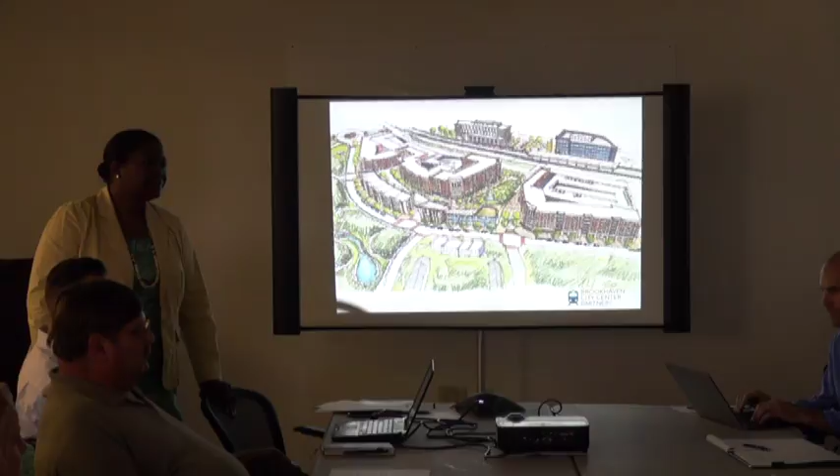Did you have any concern about a potential bias with the demographic being so young, or did that reflect the neighborhood? I think in a way, honestly, it balanced it out, because those are the segment of the groups that will likely want to go online. But if you look at our community meetings, we probably had an older group of people in attendance at those meetings.

How many people answered that didn't live in our area? I'm sorry, how many people answered the survey that didn't live in Brookhaven? It was 12%. Yeah, 88% lived in the city of Brookhaven.

The percentage of people answering the survey who use MARTA in a variety of ways, how does that compare to the general population's usage? I have no idea. We would have to dig in. So you're looking for, as a percentage of the population, were these survey takers primarily in our service area? Well, yeah—of the population, if only 10% use MARTA, but of these survey takers 40% use MARTA, that would probably be a significant difference specifically for the city of Brookhaven. Yeah, we'll look and see if we have that information. We have a research and analysis group at MARTA that may have that, so we can see if we can find it.

All right, thank you. Good. Thank you. And I think, as you said, it's going to be online. We're going to place it on our website. Yeah, get on the website.

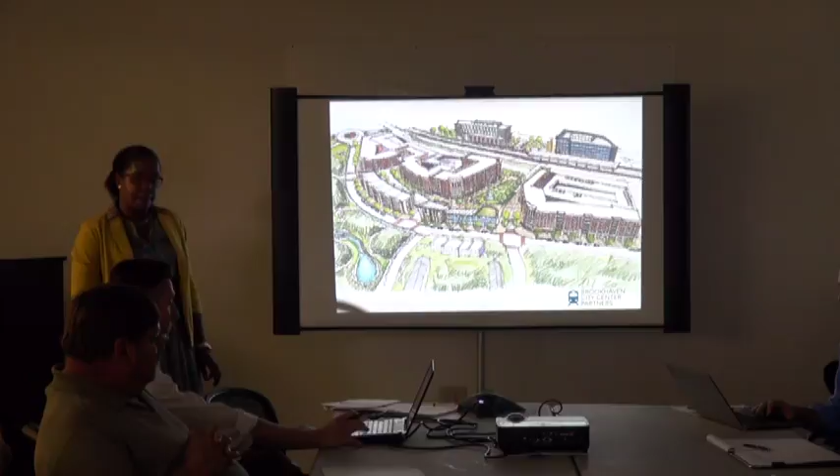The connectivity was a common theme too last week in urban planning—what are we doing to think of this more in context to good quality urbanism and connections into the neighborhoods? We have stayed pretty focused on site-specific details in a lot of our presentations, so Nicolia, who is our planner with Cooper Carry, is going to put a little more color on how we've been looking at this from the start, from that perspective, and some of the geometry and barriers that this site has that create some complexity.

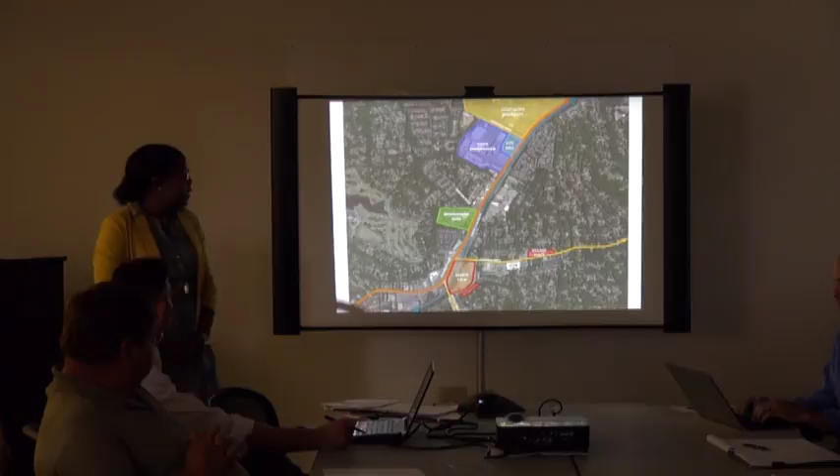Okay, thank you. So I'm going to take us back 2 years to 2014 when we started to look at the site. We received the RFP, and there were goals that MARTA had outlined for mixed-use communities—more density, improved parking, a walkable environment. Then there were the LCI goals, which had to do with creating a mixed-use center and really creating a walkable environment. All of those desires and goals align with what we would like to see happen here.

So one of the first things we did, as a design team, was try to figure out what it is that we want to accomplish here. There were three important things that came out: we wanted to improve the connections to the greater Brookhaven and its amenities, and we wanted to also create a better walkable pedestrian public realm and environment.

We also wanted to create a village center, a focal point, something that could become a heart space and an identifier for the city of Brookhaven. One of our early diagrams looked at Peachtree Road and how it is a main thoroughfare through, but also a connective spine to amenities in Brookhaven, like Oglethorpe University, Town of Brookhaven, City Hall, and Brookhaven Park. One question we had initially is how do we make connections to these amenities, and also down Dresden to the Brookhaven Village Place area? How do we incorporate connections to all of these?

Part of understanding how to connect is understanding the network we're working in. The white indicates the road system and road network currently existing around the site. There are two major constraints and barriers that run through it, almost like a river: the CSX freight line, which created a west and east side, and the MARTA tracks, which are elevated. We can get right up to it and do some things under it, but it creates development issues when constructing buildings. Peachtree Road, as wide as it is, is somewhat of a barrier too, but not if we can get it more connected. Then you have North Druid and Dresden, and we've had all the traffic discussions—these are the things we were trying to reconcile as we moved forward.

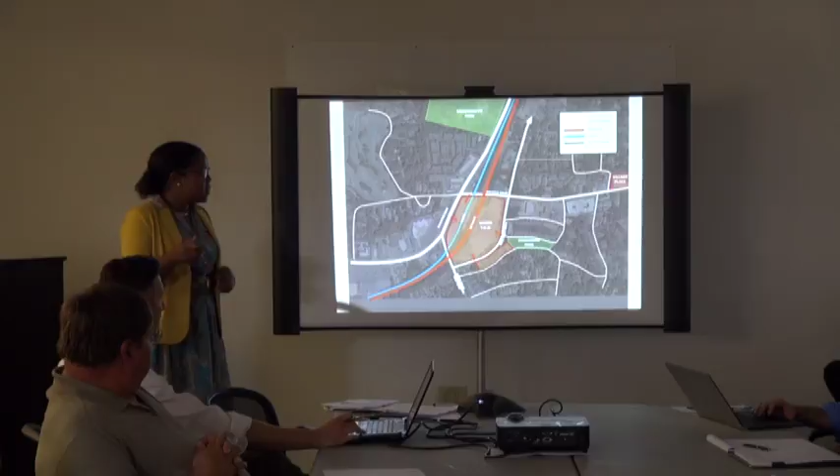One of the first things we thought about is how do we make this more connected? Traditionally in planning, we talk about a quarter-mile walking distance, averaging 5 to 10 minutes. From the MARTA station tunnel entrance, the yellow indicates what is perceived as a 5 to 10 minute walk for an individual moving through the TOD area. We wanted to figure out how to make this more connected. With the constraints of the CSX freight line and MARTA, breaking up the blocks and getting them smaller became more of a U shape with connections almost north-south. That's an introduction of a roadway that runs through, an introduction around, connecting back to the existing Fernwood and street grid, while keeping the access points into the site that currently exist along Peachtree and Dresden.

The second thing we wanted to think about is connections, not just from a vehicular standpoint, but from a multimodal and pedestrian standpoint. We looked at the bike and ped plan. The purple indicates bike lanes, and the dashed purple are sharrows, which are bike lanes essentially sharing the same space as vehicles. The blue lines indicate improved pedestrian connections, which would fill in gaps with sidewalks currently happening in Brookhaven. The orange is a multi-use path. We wanted to ensure we had connections and incorporated all of this into our design.

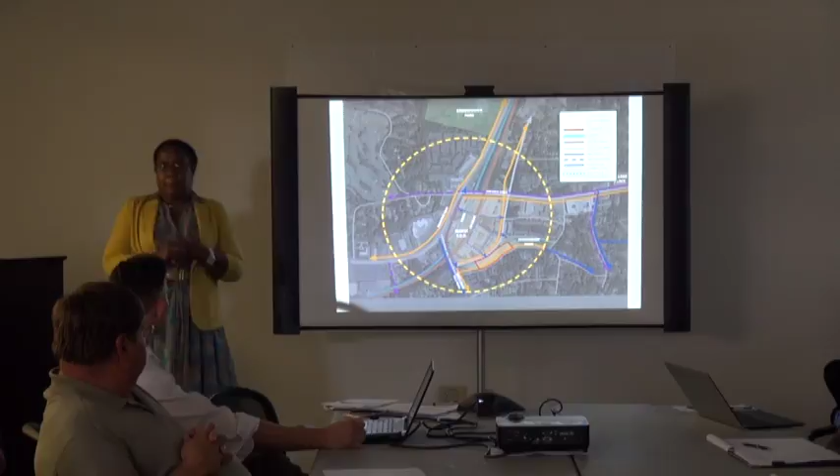Next slide. That was the city of Brookhaven bike and ped diagram. When was that done? Last year, completed this year—fairly recent, just a couple months ago.

One comment in addition: the multi-use paths that were just mentioned are not necessarily separated from the road in the definition Brookhaven has in their study. For instance, along Peachtree, they have a multi-use path, but it's essentially a 12-foot sidewalk. A lot of times when we talk about multi-use path as planners or bicycle enthusiasts, we're talking about an off-road system used for joggers, rollerbladers, bicyclists, and walkers. But in this case, Brookhaven's definition for Peachtree is a multi-use path that's a 12-foot sidewalk.

Thanks, Gary. That highlights where we're at—along Dresden, for example, there is a multi-use path. Around our site, we have 15-foot sidewalks along Dresden, down Apple Valley, and North Druid Hills, and 20-foot wide sidewalks along Peachtree. So it's wide enough, as Gary said, to accommodate some multi-use.

Does that include the 5-foot planting area between the street and the path? Yes. So a 15-foot path would be a 10-foot path with a 5-foot offset? Yes, just wanted to clarify. A 15-foot path is what they described, with a 5-foot planting area for lights, trees, and so on, and a 10-foot walkway. Probably the best way to describe it is a 20-foot pedestrian zone, in which you have the actual pavement and the street.

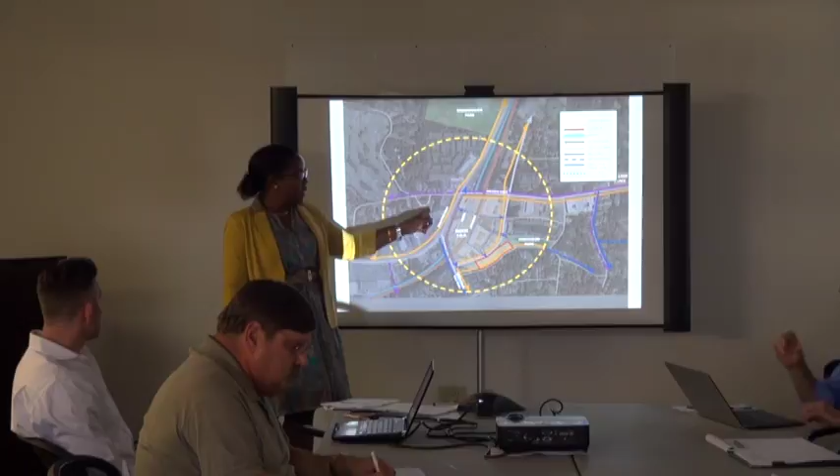When we start thinking about pedestrian connections into the site, we wanted to really connect across the site, east to west and connecting north to south. One of those major connections is through the tunnel, but we wanted to keep that over. You can't go over with the CSX freight, but there is an existing tunnel that we envision enhancing, making that connection through the site and then connecting through to Fernwood.

Following the streets within the project, making more of a connective place, and connecting to the future MARTA parking deck, which would be located here in future phases. Also strengthening and connecting Peachtree to the existing North Druid Hills, or the proposed North Druid Hills multi-use path, maintaining the Dresden multi-use path, and incorporating the good recommendations that came out of the bike ped plan.

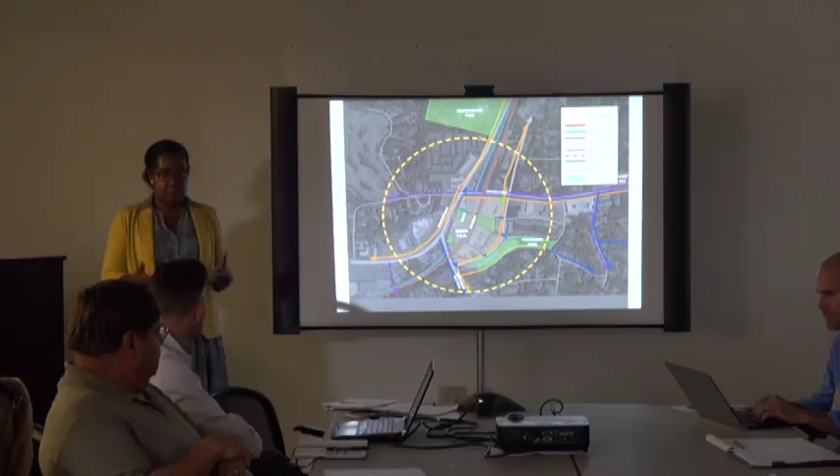One of the things that was loud and clear, and it's nice to see highlighted in the survey, was this need for a public gathering space, a community space, more parks and more open space. The LCI talked about this special focal spot, being the heart of Brookhaven, and that's what we're hoping these spaces can become, a symbol of that.

So I'm going to take a minute to clarify that, feel free to jump in if you want. Part of why we're going for rezoning is that the underlying zoning does not currently support the Peachtree overlay zone, the Brookhaven Peachtree overlay zoning. That is why we are going for rezoning.

The current zoning has industrial, commercial, RM75 and R75, which essentially gives you about 30 units, 400,000 square feet of office, and I think 30 to 50,000 square feet of retail. And it's quite a bit of parking associated with that.

If you were to read the Brookhaven Peachtree overlay guidelines and the zoning, it does not support anything that was suggested. So we are going for rezoning so we could actually build to the spirit of the Brookhaven Peachtree overlay.

I don't know if there's anything else to say. That was one of the questions from last week, and also in some follow-ups, why are you doing it? There was some broader community concern. Are you going for a bunch more density? What are you up to? Next week we'll do a better job explaining why we're having to go through all this.

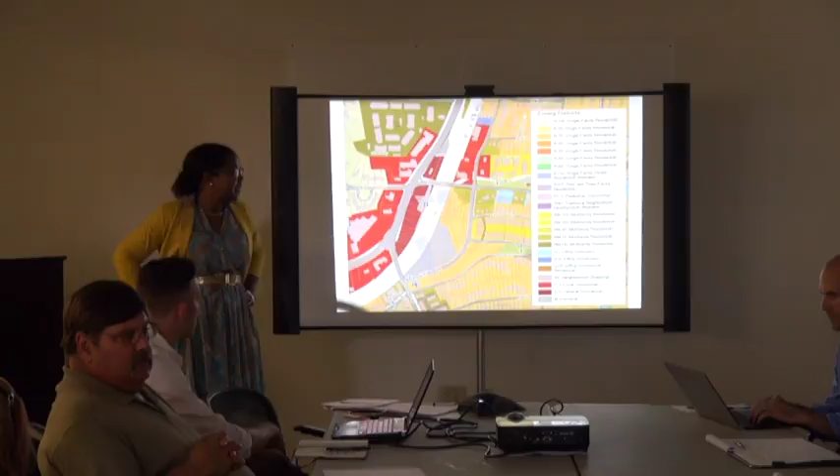Not to spend a lot of time since you went through the plan yesterday, but a quick recap of where we were back in May versus today: we reduced by about 140 units, we're almost 118,000 square feet less in office, and we've upped our neighborhood-serving retail and restaurant, and we've added the hotel.

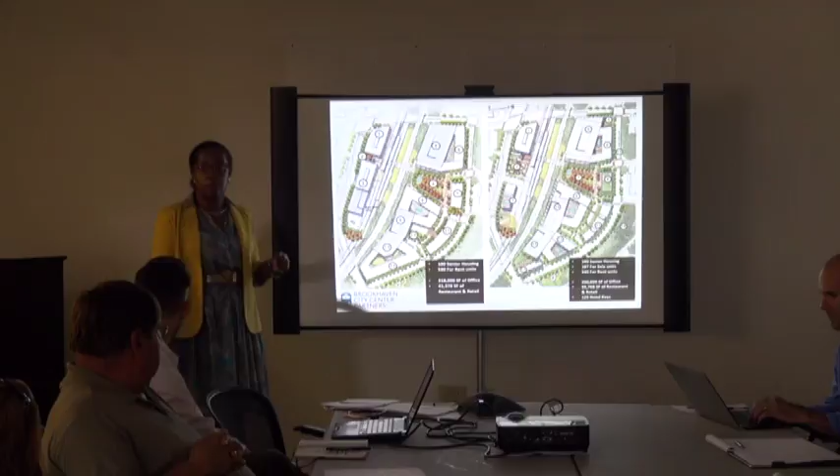And then the for-sale is now over on the right, a huge part of the southern part. You opened up the barriers to the street a lot—we punched more, it's a lot more porous now than it was. Down here we've offered more housing diversity, more products, made a more porous edge, created more comfortability, and added more. Scale is dropped, yeah, scale is dropped.

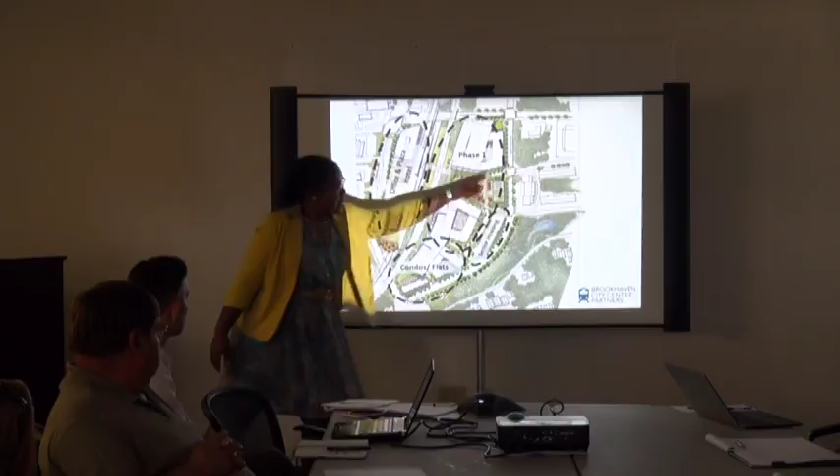The market concept we're really excited about, and on the capital part we're hoping to do something pretty cool there. Are the condo prices going to be in phase 1? They'll come later, probably phase 2. We've earmarked it as phase 2 because we're not going to be able to sell stuff until the first phase is clean—it's very difficult to sell high-end product when it's a construction zone next door.

So they're probably phase 2. Yes, phase 1 centers around the town green—that's about 340 units, about 40,000 square feet of neighborhood-serving retail, and about three-quarters of an acre of public space that we're giving back.

Do you have some idea of the price range on the condos, or have you mentioned it? We don't—by default, since you said high end, they're going to be pretty expensive. But we haven't even started programming because we've just introduced that whole concept.

Also, the way we're structuring this now, the senior housing block we're going to use for staging to get through phase 1—we're going to need some temporary parking for MARTA. We're going to go into design and programming for the for-sale product, and then we'll be in pre-sale on the office building, and it can go as fast as we get that done.

Does that make sense? It's a little bit of a Rubik's Cube, and to Nicolia's point, the geometry is unbelievably tough on this site. On the Peachtree frontage where the hotel is, you can't really get much building—the geometry is very tough. So we've been fighting that battle, and you can see how it pinches down on the southern end on the other side as well, so the scale will drop and we'll do some different things.

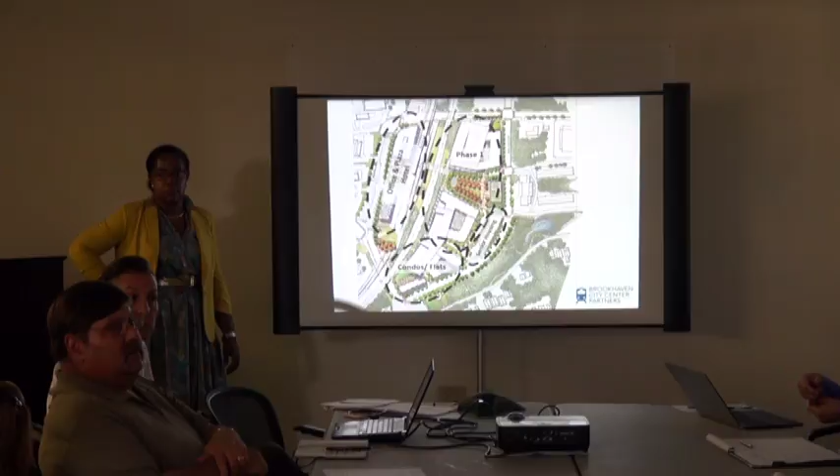The bus driveway on North Druid Hills today is outbound only. We're proposing to convert a section of that to allow traffic from the west side of the site to go right in, right out. So we're working on all that ingress right now.

Okay, beautiful. Thank you, Nicole. That's awesome. Any questions on that?

It might make sense, Gary, for you to go ahead and dive right into the public spaces, because this all ties together. We'll go from there to architectural concepts. We've still got work to do on elevations, but we're making progress. Clearly, even after our zoning application, we're probably going to be fiddling with that. The zoning process is fairly long, so it's going to take time.

That's quite right. Good evening, welcome. For those of you I've not met last week, my name is Gary. I'm a landscape architect and public space planner.

It's projects like this that I love being a landscape architect, because MARTA says public space is the most important thing about this project. So I am the most important guy in the room at the moment. I heard it from MARTA — the most important thing from the survey was public space.

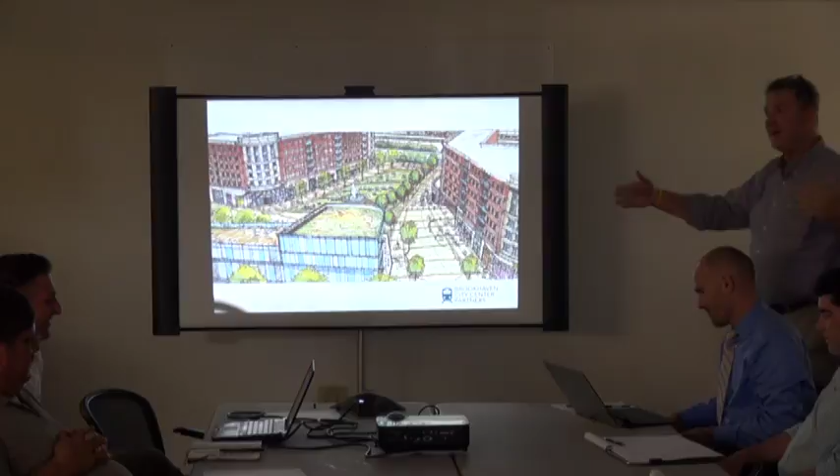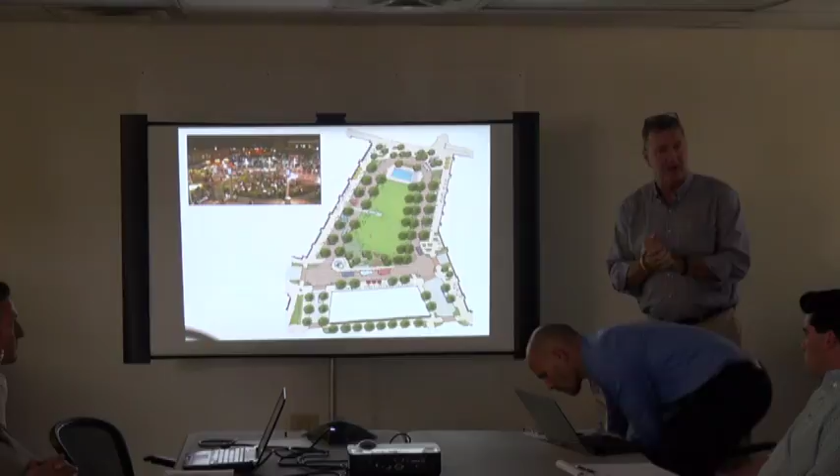So we're going to do a real quick recap of what we talked about last week. We truly believe that the public realm is going to be one of the most important success drivers for this project. We have a good mix of building uses and land uses, but the public realm, the town center, and where we spend time outside our apartments and offices is really going to help drive this project to great success.

We've always believed this is essentially going to become the town green for the community. As Nicolia mentioned, we have the plaza at Peachtree, which we'll talk about in a moment — that's access and moving through, and the visibility profile for this community from Peachtree. Then the real synergy and activities, the core of the community, will be in this park here, approximately three-quarters of an acre.

There's about 15,000 square feet of lawn space here, so we could have movie night, yoga classes, throw a frisbee, kick a soccer ball with your kids, and have great times. This is going to be the heart of the community, we believe. It's a very flexible space.

We do have retail on both sides of it. It's a space that will be shared with automobiles and food trucks, very highly pedestrian oriented. It can easily be closed off for special events and activities, so this is where the art festival will happen and all kinds of great opportunities. We believe there's potentially a small fountain for interactivity and play, and noise to kind of mask some of the noise from the tracks and from Peachtree.

We believe there's public art, lots of shade, and great movable furniture, movable pieces that can be moved around. In February, you're going to move your chair out to the sun to catch it, and come mid-June, you're going to move your chair back into the shade, which provides that great flexibility.

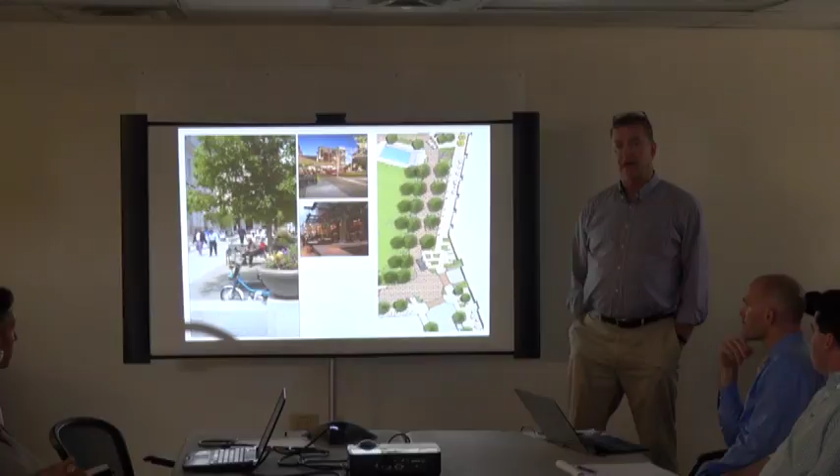I'm sorry, I have a quick question. These images are great, but one thing I don't see in them is vehicles. So I'm wondering, why is the default that vehicles would be allowed, but we could prohibit them, as opposed to prohibiting them and then finding a way if service vehicles have to come in the early hours or something?

Sure. Well, if you do lots of retail studies and restaurant studies and those kind of things in planning, vehicles really help. Having access for vehicles really starts to help drive success in those restaurants and those shops. If I'm a retailer, I want to be able to have parking in front of my space, have shoppers come nearby. But we're just a very car-oriented society, unfortunately.

And so that's how these spaces will tend to operate. Now, what the hours of operation are going to be, we don't know yet. And we do have to provide services and deliveries for these kind of things. These things could be open for 2 or 3 hours a day for vehicles, or could be open for 6 or 8 hours a day, and the rest of the time it's closed, or vice versa.

Would that be like the City of Brookhaven decision or MARTA project decision? I would think it's... No. No? Okay. That'd be a no. It would be a joint thing, but it's a privately owned street.

I would just add, we're dealing with this issue at all of our TOD projects, and from MARTA's perspective, it's tough. We want to restrict the use of automobiles in our TOD projects as much as possible. You don't want them driving to the restaurant. Right, it's a little bit counter to what we're trying to accomplish with these projects, but in order for these retailers to be successful, they have to have parking.

This is Atlanta, this is the situation today. We have the ability to change it over time if necessary, but if we want to be able to attract good retailers and we want them to be successful, there has to be a hint of parking. But it's flexible so that we can shut it down for festivals or big events or anything like that.

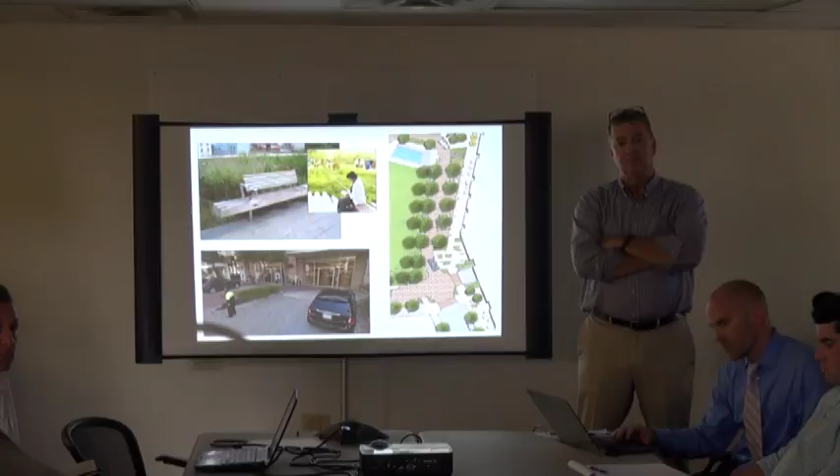Do you anticipate valet operations happening in there? Potentially, yes. I experienced it in Spain or Italy, and it's amazing how it works—you just all maneuver around each other. With aging parents, I can envision being able to drop them off and go park, or if you're picking up something you've purchased, being able to run in. I can see why retailers would want at least some flexibility, even if it's just one or two cars.

One last point—where I went to college, we utilized this on both of our campuses, in all parts. I mean, if you do this with drunk college kids... that's a good point. That doesn't happen in Oglethorpe, does it? No.

Will there be bike racks? Sure, yes—there'll be bike racks all throughout this as a true multimodal space. Near MARTA entrances we may have bike racks, we may have bike lockers. There's lots of things—we may have a bike shop that has temporary bike storage.

Will there be public restrooms? Don't know. I have to think about that—not probably just standalone porta-potties. If you go to Krog Street Market, there are restrooms there and you can just wander in and use them. It's not like a restaurant where you're walking in, buying something, and only customers can use the restroom. In the market down here, I suspect it will probably operate the same kind of way. We don't know—we'll have to figure it out.

Like those movie nights you're talking about—the way it's done in a lot of places is they bring in a truck. They're pretty fancy nowadays, but it actually stays on the truck, they don't unload it. But it's a good point, we need to probably explore that more.

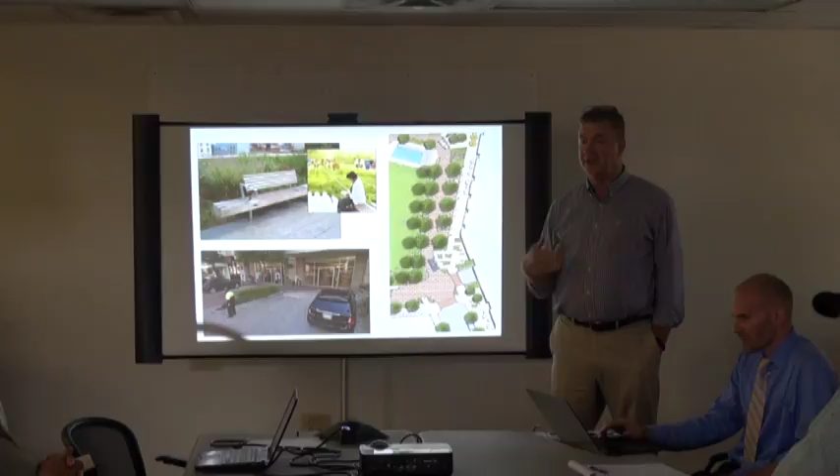How will maintenance and deliveries be done for the retail and restaurants? Would this be service and time restricted to early morning times? It would need to be time restricted. Most restaurants have time restrictions anyway—I don't want a delivery truck showing up at 12:30. If you're delivering to my restaurant, you need to be here by 9, period, and you're out the door. Those kinds of things have to happen.

Yes. So for the sake of time, do you want to go ahead? Yeah, we'll keep going. I think we're about done. I think the next slide talks about... we talk about the MARTA Plaza.

The MARTA Plaza, real quick—as Nicolia mentioned, this is public space, it is a park, but it's really kind of the gateway. This is the visual gateway from Peachtree as people travel through the community. We have a lot of passer-throughers coming through, and here's an opportunity to announce the entry to MARTA, and also to announce that there is something special happening in Brookhaven here.

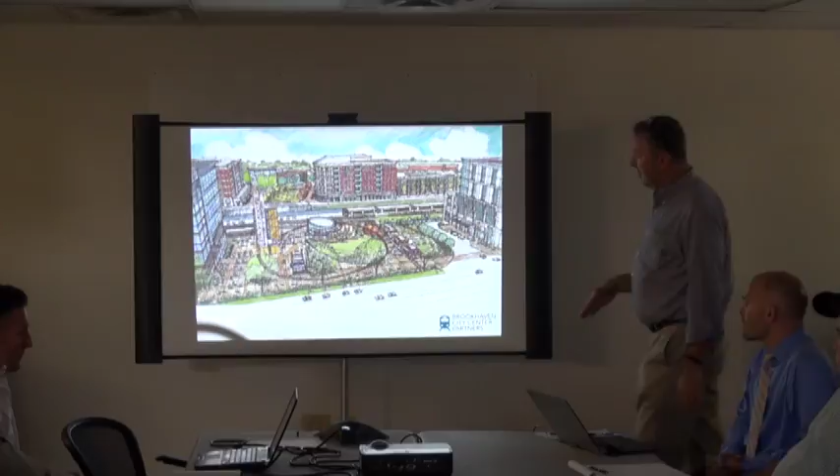On the next slide we talk about how people would move through this plaza, with Peachtree up here. We have the ramp system that brings us down to grade to the MARTA entry, and it's a very flexible space. It's certainly not as large as the town green space, but it is flexible—we could have smaller classes, smaller gatherings, smaller food truck events, and those kinds of things. It becomes a different type of space, but it's still extremely usable. Can you walk through that in more detail? I can't—it's a confusing drawing to get into.

Let's talk about elevations from Peachtree. This is the proposed office location, and the hotel we talked about is over here. This is Peachtree, with access coming in from Peachtree.

There's a grade change from Peachtree to this level of about 6 feet. The idea is that this upper plaza would be at Peachtree level, and you could walk along Peachtree and enter the plaza from these two locations, in front of the hotel or in front of the office. You could access the office here, or come down the stairs to the MARTA tunnel, or use the ramp which leads eventually to MARTA.

There's also another set of stairs here. So we're trying to make up a 6-foot change in elevation, but that line we've drawn runs right through there. It's important to note it's not 6 feet straight down to the other side—there's about a 2% slope once you hit the ramp, so it's gradual, not a sudden drop. It's a 2% slope down to the front yard, so you won't notice the grade changing significantly.

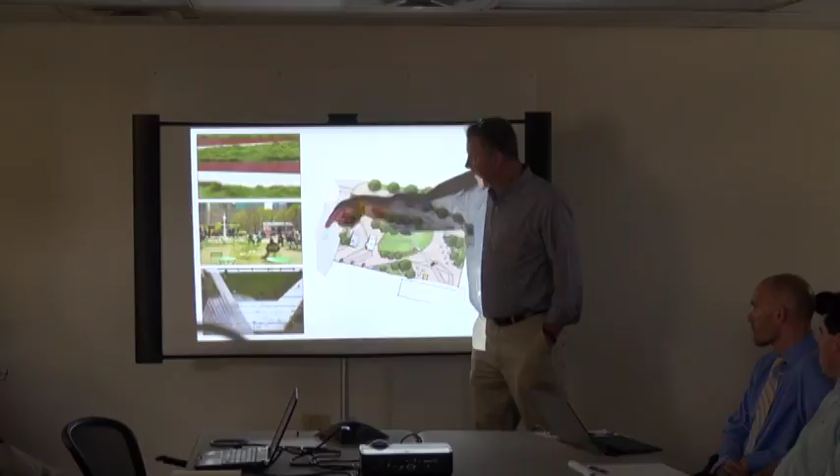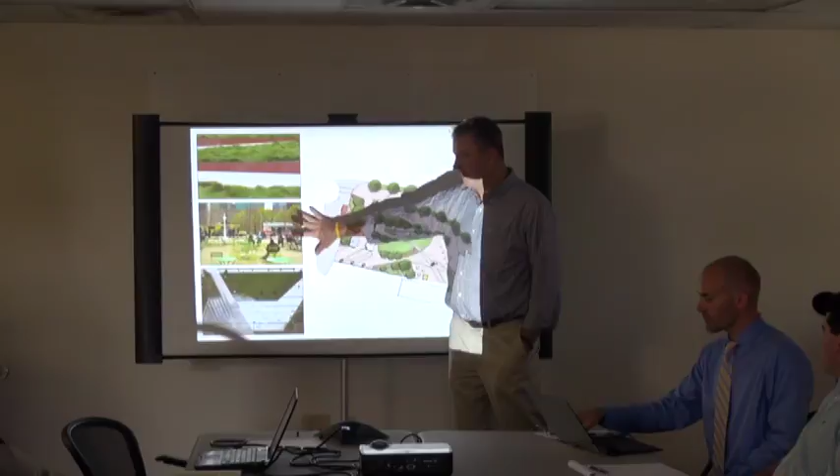All right, other questions? Great. So before we jump into architecture, are there any global questions about the plan?

The layout of public space, and how we're working with the geometry we have to work with—there's actually a lot more porosity and pedestrian passageways than you would think. We're working with a long, thin site, split into two halves.

That's the challenge. The one you showed on Peachtree had a row of trees and then the plaza—is that front part of the plaza the sidewalk that's going to be along Peachtree? There won't be a secondary sidewalk on the rear.

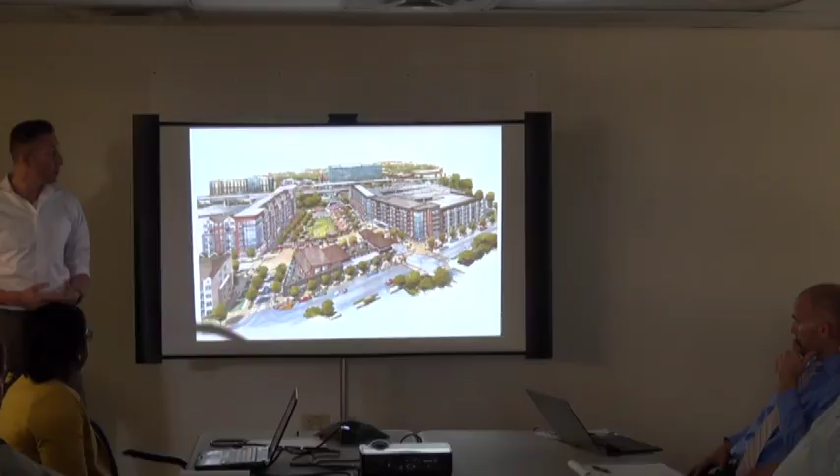But I'd like to start here at the top of the drawing. Last week we heard some negative comments concerning the office tower. So we took a pause and we were looking at redefining what the architecture is at the office, the hotel, and the transit plaza, and making sure those three items really do work in concert. So you haven't or won't see any advancement today in that area, as our team is going to start revisiting that process. So the office building is not the office building.

Right, this is just the office building's facade. It's a placeholder, but we recognize that there is a need and a desire to have a signature building on Peachtree Street that really does identify Brookhaven as a neighborhood. When you reach it, we recognize that north corridor is a very prominent view, and you want it to be the gateway into your community. And I guess a basic glass building isn't going to cut it, so we're going to look to do something a little bit more iconic.

Also, you can see from this aerial how we're trying to break up those blocks from an architectural standpoint, so that they do read as several buildings, not one major building.

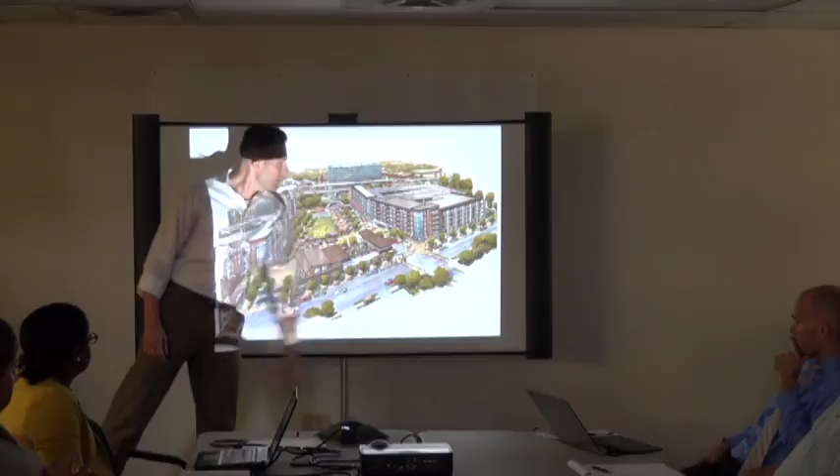So to give you a lay of the land, Dresden's here, North Druid is behind me, and then of course this is the public green, and then our market concept building here at the... What is the road? This is Apple Valley. So it's Apple Valley, across the way.

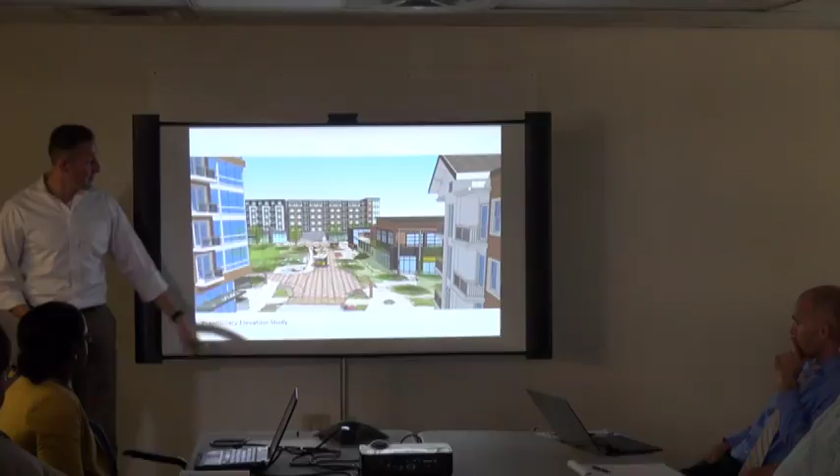So this would be, for example, someone's view from their balcony looking into the public green. This again is that Fernwood Market or that market concept building with the apartments behind. You can see some food trucks and some of that other retail language starting to populate the activity in the park.

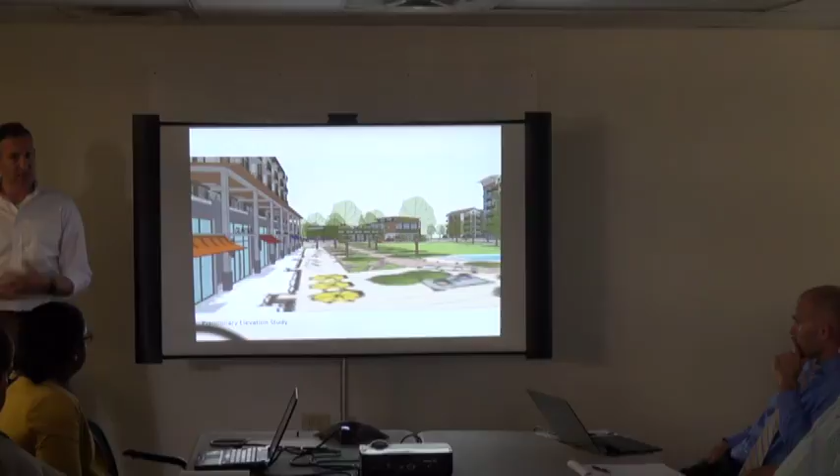This would be your view if you exit the tunnel. What we're trying to look at doing is when you come from the parking garage into the MARTA tunnel and into the MARTA station, you are crossing over the thresholds of restaurants, coffee bars, patios, and all that stuff that we like to see on the sidewalk. And we further articulate that with some activity above, maybe gracious patios with people in the rental units above looking down, adding to that language and that activity.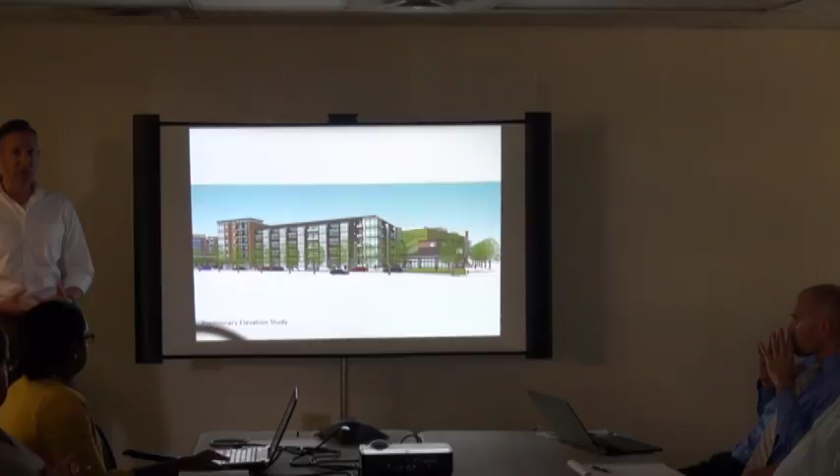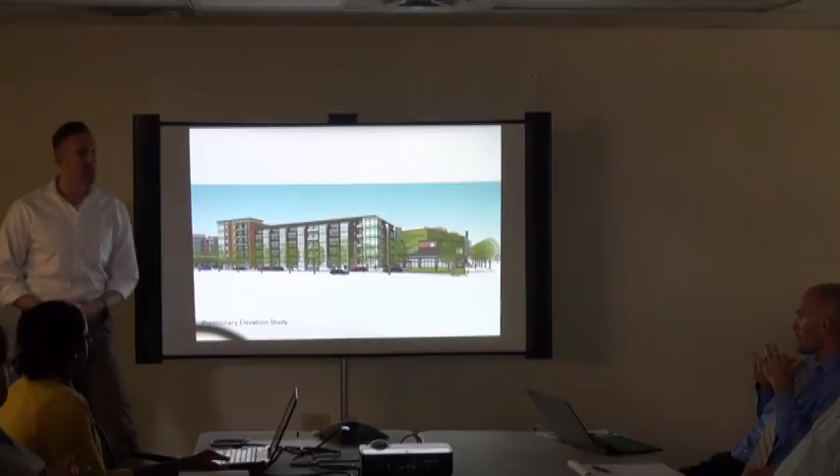Again, we're trying to create a more contemporary language of architecture that does kind of resemble some of the stuff you'd be familiar with at Oglethorpe, but still looks like it belongs on Dresden. We also heard that you didn't necessarily want the corner park to have a one-story active use fronting the garage, so we've gone and replaced it with live-work units marching up the street. You'll have work below, residents above, and to further disguise it, we're showing an occupied patio on the third floor. We're still designing for a green wall in some regards, to further disguise the rest of the garage.

And here, of course, is our illustrator's idea of what the space could feel like when it's a mature product. Again, that's Apple Valley, Chris. Right, so this is the entrance to Apple Valley. We're here on Dresden.

One observation I've made in Atlanta is that the overhang patios are quite small. You might get a 2-foot diameter table and two lawn chairs out there and nothing else. Whereas in places like Vancouver, you actually have almost a room out there with a standard patio table and seating for 4 or 6. It has to be cantilevered, and it's a more temperate climate, but people spend more time on their patios if they have an apartment overseeing what's going on.

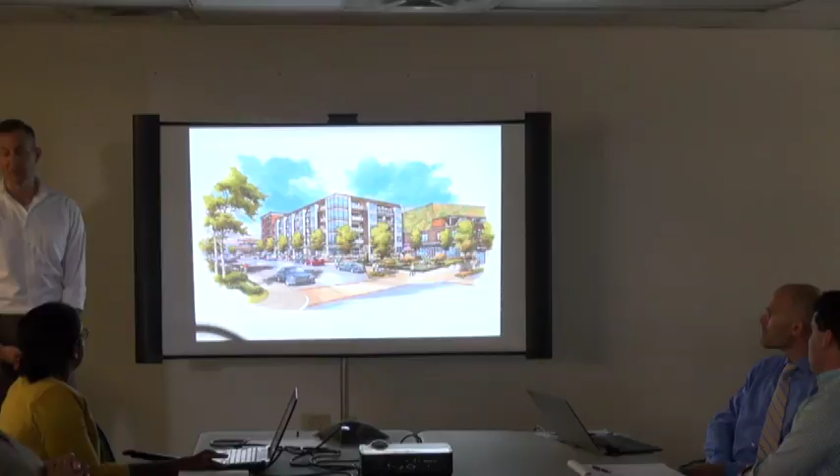We're looking at different balcony alternatives, Joe. We've done 5 before, we've done 4. They won't be small—we need to account for a wheelchair turning radius, so they'll be large enough. Sometimes it also comes down to a difference between for-rent and for-sale units on those balconies, and Vancouver is mostly for-sale.

So are you anticipating doing anything over on the actual platform of the tracks? I know, MARTA, you think your tracks are really sexy, but is there anything like a canopy up there, or anything to make the tracks and the platform something you could draw visually?

We don't have anything planned right now as far as major capital improvements like that, but we would be open to some sort of aesthetic improvement, like a mural. We just finished one at the King Memorial Station, so that's something we could certainly consider here, and it would be relatively easy to execute if that's what the community wanted to see.

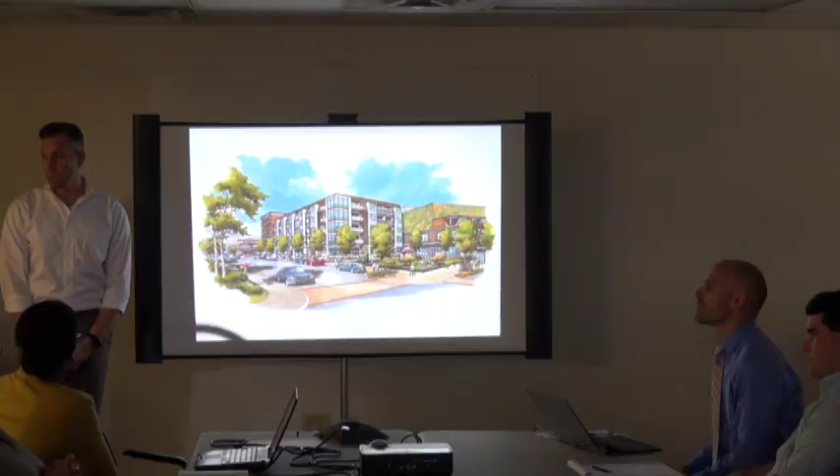So you're saying—not to give you a hard time—no major improvements of that scale? Actually, in preparation for our meeting next week, we're going to get a list of the projects scheduled at the station, but a lot of them are functional improvements, not necessarily aesthetic ones. That's really the primary focus—just to make the station more comfortable and work better.

Well, in the western sun—I actually take this train station—it beats on you when it's setting. Part of the quarter-mile walk has to do with heat and perspiration, and it's horrible wind too. You have different elements—some kind of shaded screen elements, and things that visually break it up—I think that would be inexpensive for MARTA as well as beneficial to riders. I think we should take that into consideration. Yeah, everything we do is expensive.

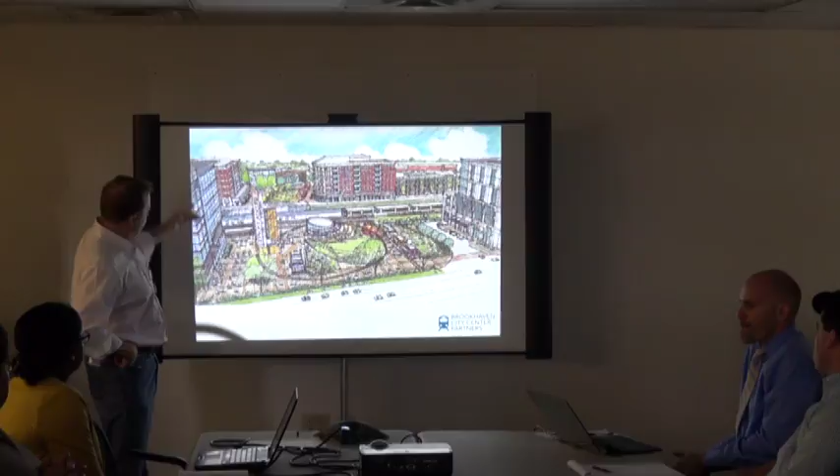One other point of information: they do have capital funding to put in elevators and escalators. So that's why this is here—what we were thinking in our original concept was that since they've got funds for that, we could probably add on to it to create more of a visual cue so you can clearly see people going up and down. We haven't figured this out yet, but we want some kind of visual signage that's interesting. There were some comments about neon and that kind of thing, but it wouldn't be something that beats into the neighborhoods. We've got to figure out a cool visual cue signage, but also a dramatic visual element coming up and around. We're working on all that right now.

So I was actually reacting to it more from the backside. Oh, the backside—yeah, I like the vertical element there. Oh cool, the image that got me thinking about it was... Yeah, I know what you're talking about.

That one, yeah. We considered this great space, and then there's that entry on that side. That's pretty easy to tear off - I'm talking about that kind of goofy, fake thing. So we were probably figuring we'd offer to rip that off and put something else up there, a little more cool, a little more visual, and also introduce some green planting.

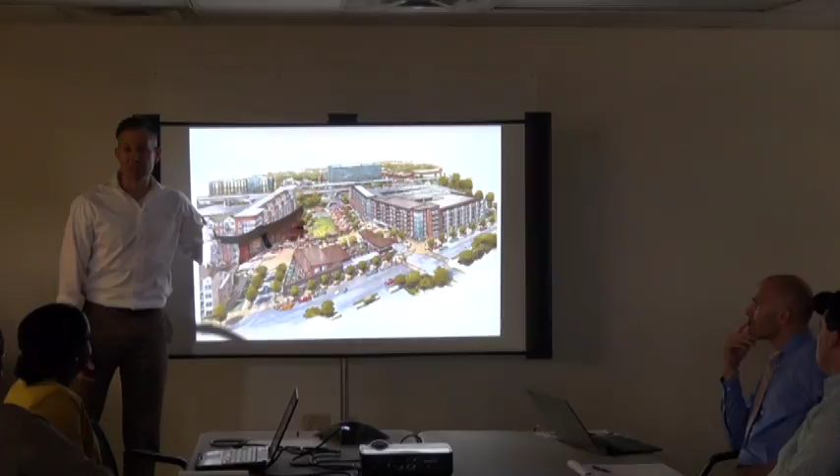Where's Gary? We understand we'll need a backdrop here, either architectural or from landscape. So have some kind of something going on, tearing up the freight tracks, and then a lot better visual cue going into that tunnel.

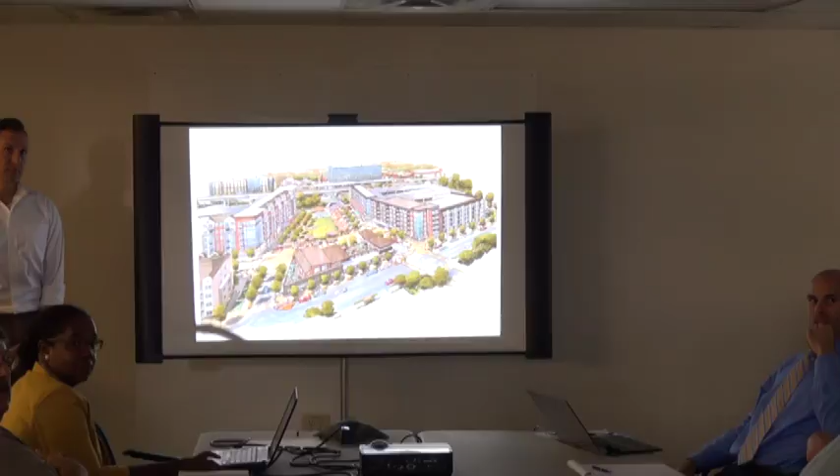Could some of that be scheduled, like when's the next train going to be at the station? Maybe - you have 5 minutes to make it. It's probably electronic, but yeah, I like that. We're actually doing that in some of our other TODs - in the green space areas and plazas we can easily have a display board that explains the next train is in 5 to 10 minutes, so you can grab your coffee and then head over to the station. It allows you to plan accordingly.

But it could be not flat - you know how they do it in New York? It's kind of arced and flowing around. It could be something kind of cool, so you get it from two different angles. Yeah, you can see it.

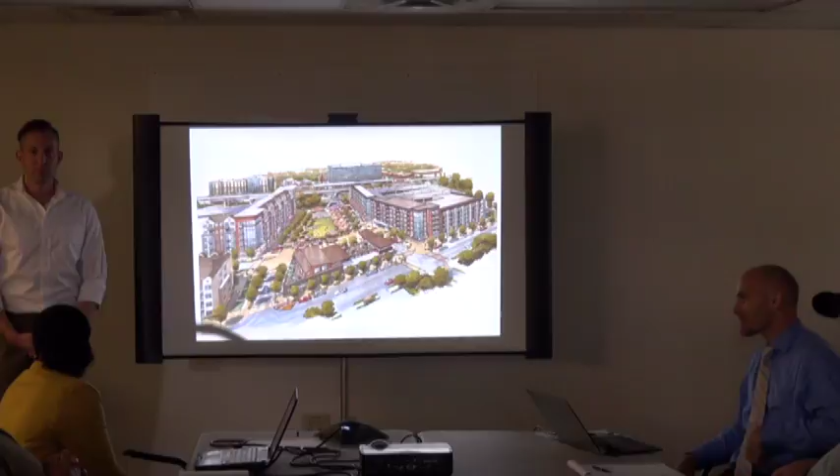Well, we think that would maybe pay for a canopy that'll fit the station to the architecture surrounding it versus sticking out like a sore thumb. We specifically instructed our development partners not to touch the station because it really complicates things, so it's something we really will need to take on if anything is done to the station. In fairness, there are a lot of complicated issues when you're running a train - security is clearly a major thing, but they've got a lot to think about. So we kind of protected that zone.

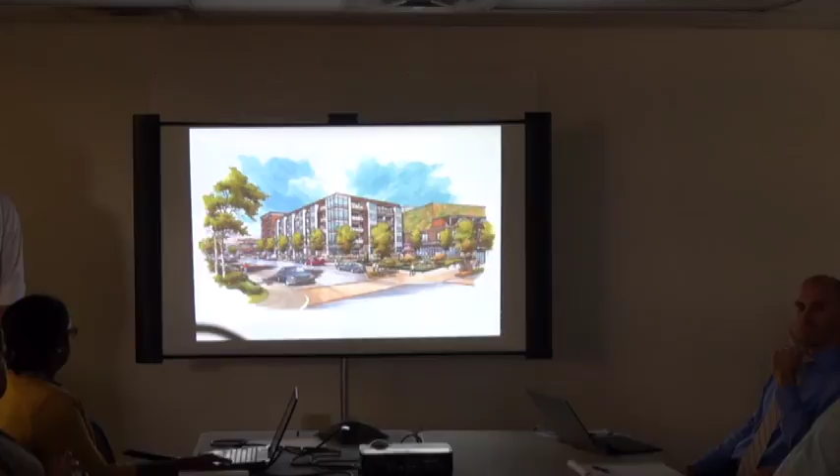Have you thought about trying to connect the MARTA area to the Brookhaven Park area? It's across the street. The city of Brookhaven's bicycle and pedestrian master plan has two recommendations: one is to build a 5-foot sidewalk, or to build a 12-foot wide sidewalk, from the MARTA station to Brookhaven Park.

Okay, so any more questions? Well, just one thing - I know there's absolutely no way this will happen, but since I'm a huge Amtrak fan and I've been all around the country by Amtrak, anybody who's ridden Amtrak would probably agree we've got one of the worst Amtrak stations in the country. For many reasons, I would love to see - and I know it can't happen - a way to marry Amtrak with the Brookhaven MARTA, since the train obviously comes right through there.

We have started having conversations with Amtrak about relocating their Atlanta station. There are a couple of challenging issues. One, they won't pay for it - they pay $1 a year at their station in Atlanta. Two, they like an Atlanta address; they like to be in the city of Atlanta proper for their Atlanta station. Three, this is a pretty active line right here, and there aren't any spurs the train could pull off onto, so you'd have to create more space on a very tight site to service that train so it wouldn't hold up traffic. So there are some pretty significant issues.

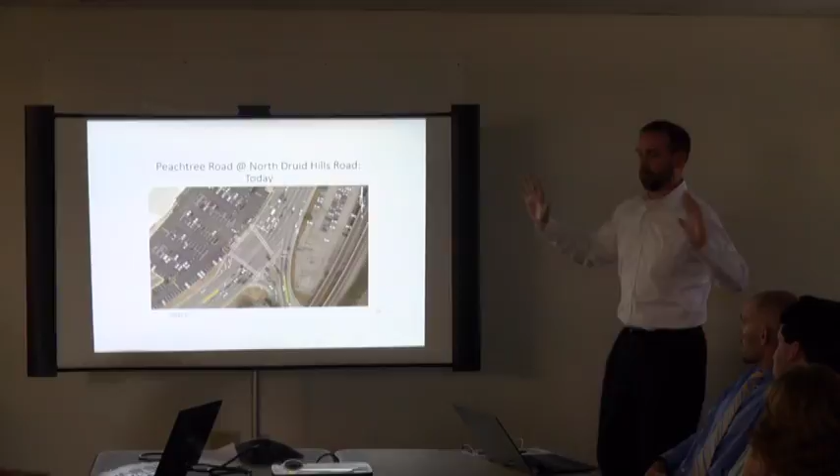Long story short, we've taken a lot of information. This is our best stab at what we think is the best thing to do here. We understand we're not working in a silo, so we share this with everybody — we share it with GDOT. Peachtree is a very vital road in Brookhaven and beyond, so we have to work with a lot of partners to make these things happen. They have a lot of questions, they will have a lot of questions, and there are going to be a lot of details to work out as we go through this process.

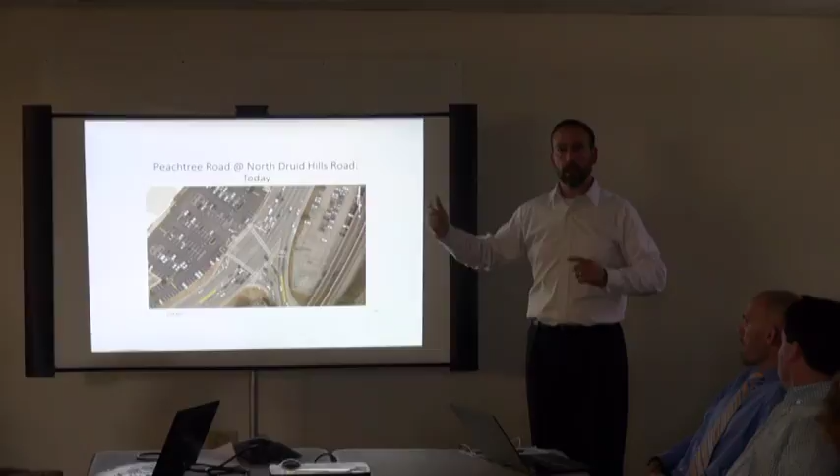So we're actually in the process of removing draft from everything and making it final, so we can present our final findings. We still think this is where we're going, but we're going to be put through the wringer with a lot of stakeholders as they review that traffic study, and then we'll get into a lot of the detailed design questions. When will the draft traffic study be available for the public? Probably within about 2 weeks — it'll probably match up with our submission for zoning, 1st of July. May not want to take draft off of it, because there'll probably be comments and adjustments to the final. Well, you're talking about for the DRI. But there's also the site itself. There's always that.

There's always that, and we understand that. A lot of people see final and they think it's etched in concrete. Right, a living document that needs adjustment.

So, sorry I missed last week, but this is the existing conditions today at Peachtree and North Druid Hills. Next is what we're proposing.

This is intended to be cartoony because there are a lot of details of the road and the right-of-way width that we don't know yet, and we haven't talked with our stakeholders, GDOT, city, in detail about the traffic, so we don't want these to look final.

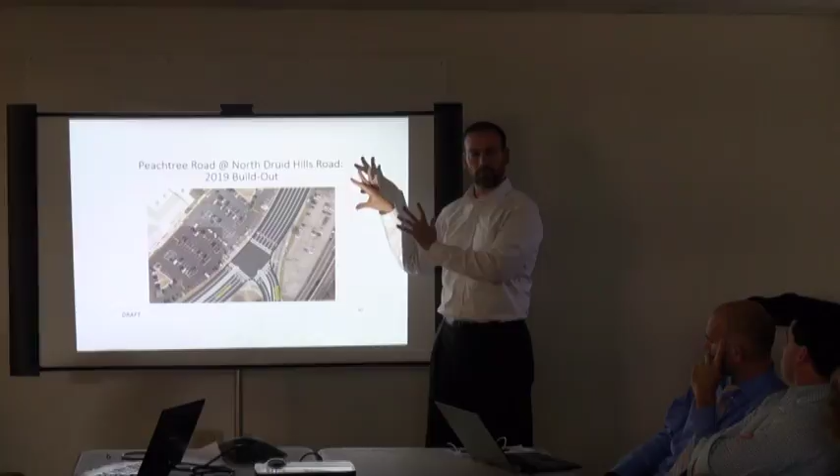But when we talk about these improvements, this is always a TOD, a project around a transit station. So the pedestrian and bikes and crossing these roads and these vehicles is always high on our mind, and making sure that we accommodate those.

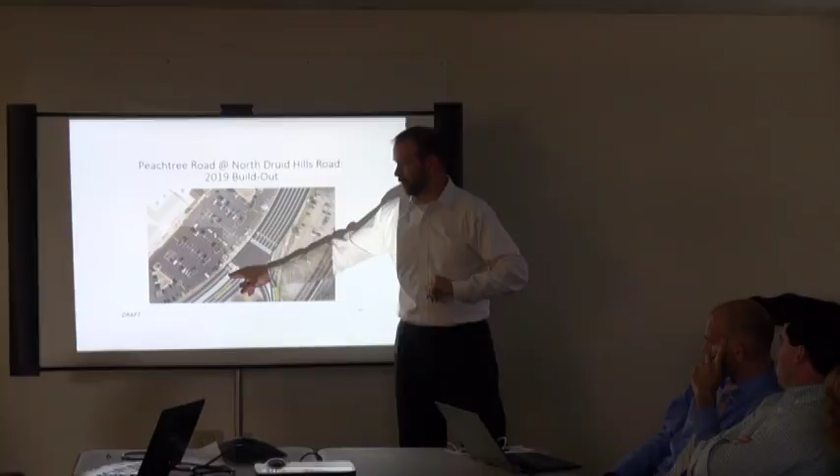The main thing here at Peachtree and North Druid Hills is adding a second southbound left turn lane. When we do that, we create a shadow of one of those left turn lanes on the south side of the intersection, which is a great place to put a median to have a pedestrian refuge that could be beautified, replanted. We heard a lot of comments about possibly bringing the Buckhead concept of that median and putting it up here as well, which we think is a great idea.

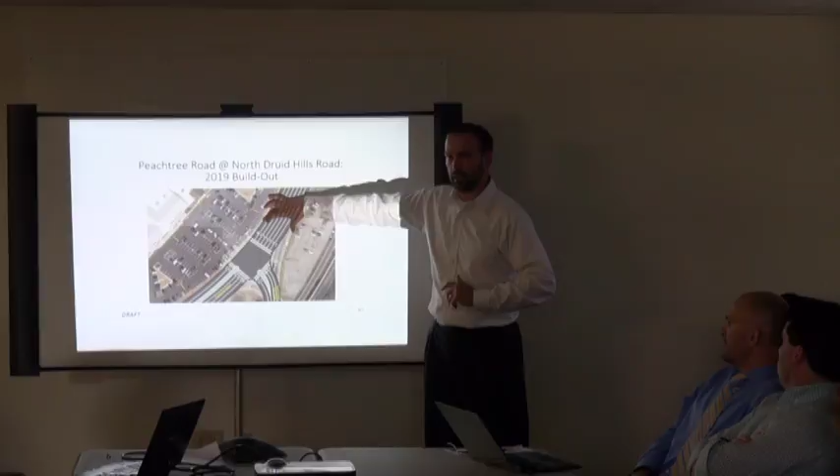One thing that's not shown here is, this is a lot of lanes, and these are a lot of wide lanes. One of the things we're trying to talk with GDOT about is narrowing these lanes.

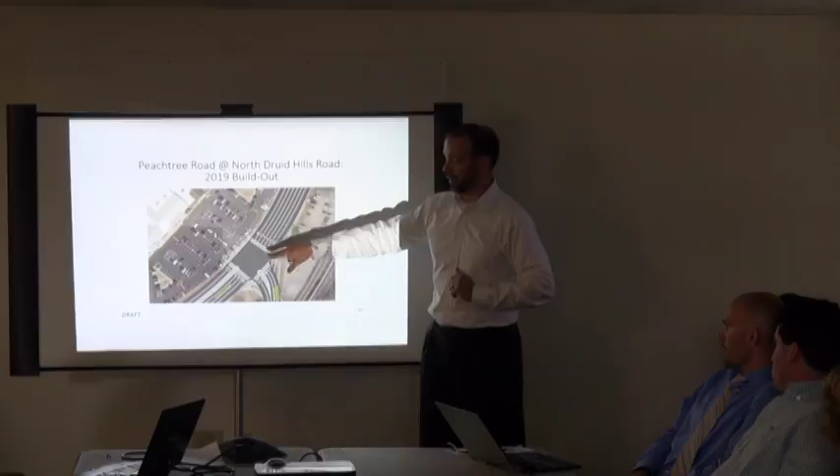We talked about variances before. Narrowing these lanes would be a variance with GDOT, so we have to go to GDOT and ask some things because we do want to make these things better. If we can get narrower lanes, I think we can fit in a median to extend them between Druid Hills and Dresden.

Question: what do you need to take them to get that? Like we said, wide lanes - what we have out there is wide.

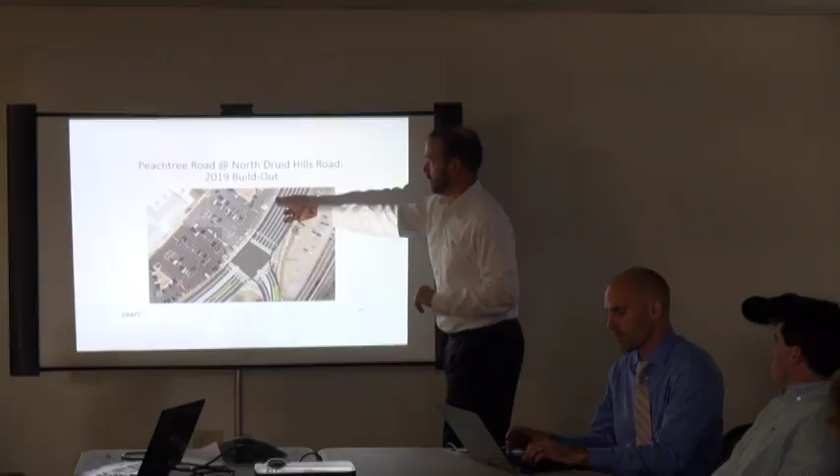Today we haven't run across here because we didn't want to run across this section of the road - we ran across up on the north of Dresden. Dresden, where it's straight, is 75 feet from face of curb to face of curb, and there are 6 lanes today on Peachtree north of Dresden.

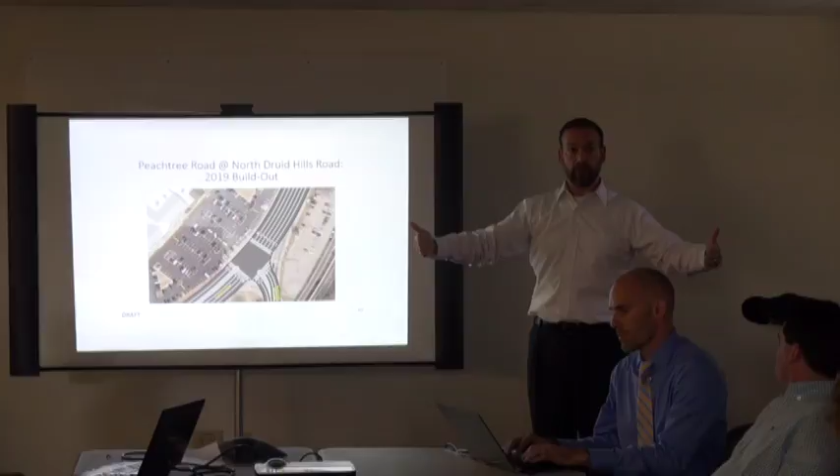12-foot lanes, 75 feet, and 2 feet of that on each side is a gutter pan for the water to drain out. In a lot of places in Atlanta, you see the gutter pan paved as part of a lane. That might be something that could help us include things like a median in the road, but that's out of the norm for GDOT.

So it's not something I can get up in front of you today and say, yes, we can go do that. I'm trying to be very careful about what we're saying we can do, because there's still a lot of coordination to do.

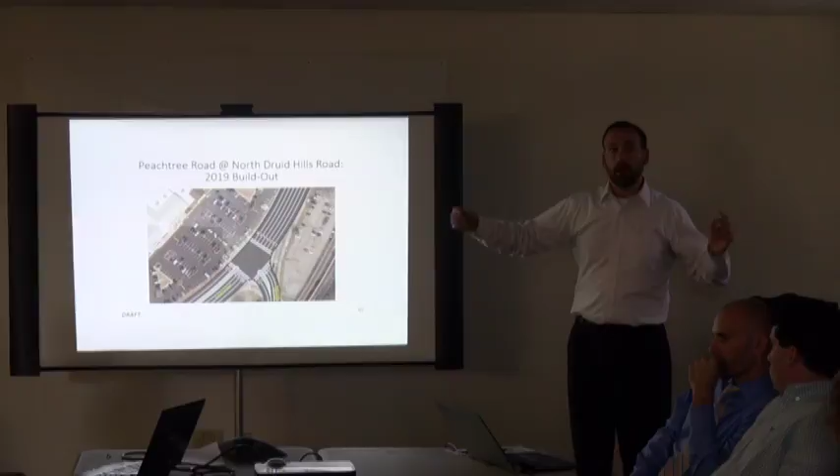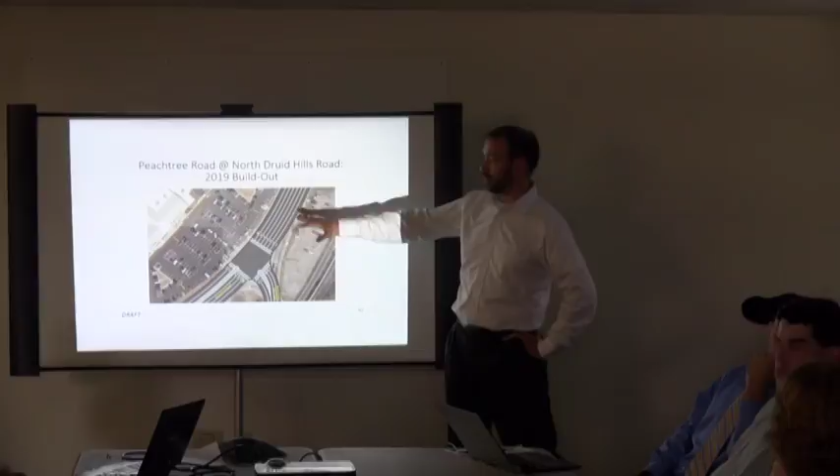So in theory, just in theory, when we talk about narrowing lanes on a road like this, we're going from 12 to 11, 12 to 10. This could end up anywhere between maybe 10 and a quarter foot to 10 and 3/4 foot.

Is 11 feet a reasonable, pretty easy request of GDOT? Less than that is harder. It's probably worth mentioning though that a lot of the lanes down Peachtree are already narrow. Yes, absolutely - this area has never been looked at, studied, messed with. These lanes are way too wide and a waste.

The other thing we know is that there's the LCI project along this corridor to build a multi-use path and improve sidewalk connectivity up and down Peachtree. One of the other things we've heard is a desire from the city's perspective to reduce the speed limit on Peachtree.

When you get up past Dresden, it's more like a highway than a road, right? So narrowing lanes would slow people down. That could be a consistent theme, along with improving the pedestrian experience with the LCI project - narrowing the lanes to fit in some lanes where we need mobility for vehicles, and allowing pedestrian refuges in the middle of the street.

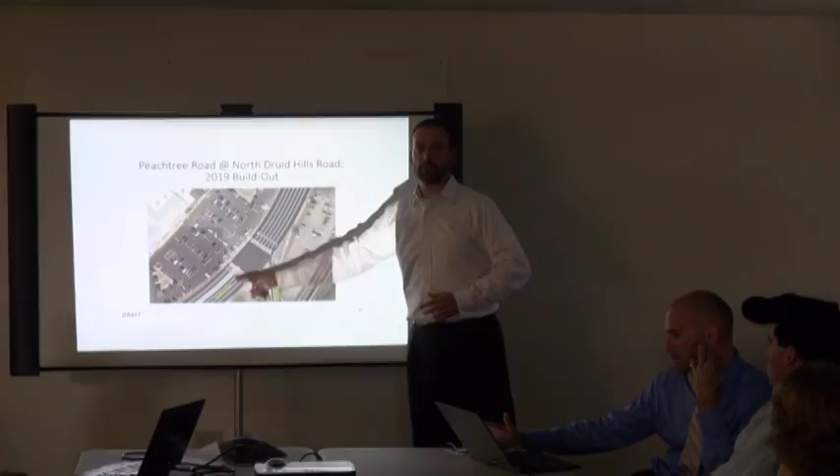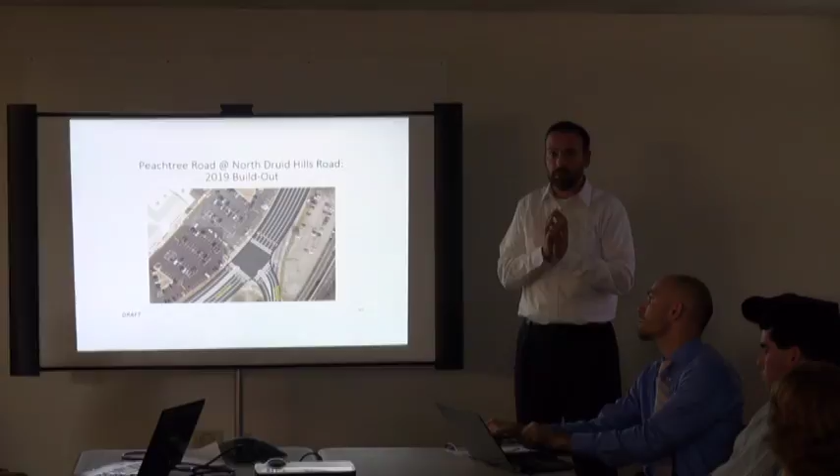There seems to be, in my perspective, an alignment of things that can help us get there. We need to work with GDOT to make that happen.

How large is a pedestrian refuge or median if you're able to get one? What's that size? A pedestrian refuge would have to be at least 6 feet. The bigger the better. Sometimes you'll put push buttons in the middle so a pedestrian can do what's called a two-stage pedestrian crossing. I don't know that we would do that here, but we might. It just depends on how wide we can get that.

The planters in Buckhead that we keep referring to, the planting area itself is about 5 or 6 feet, with 6 to 8 inches of curb on both sides. If you drive along those planters, you'll notice there's a yellow line on the ground next to the planter. From yellow line to yellow line is about 8 to 9 feet, but the planter itself is about 6.

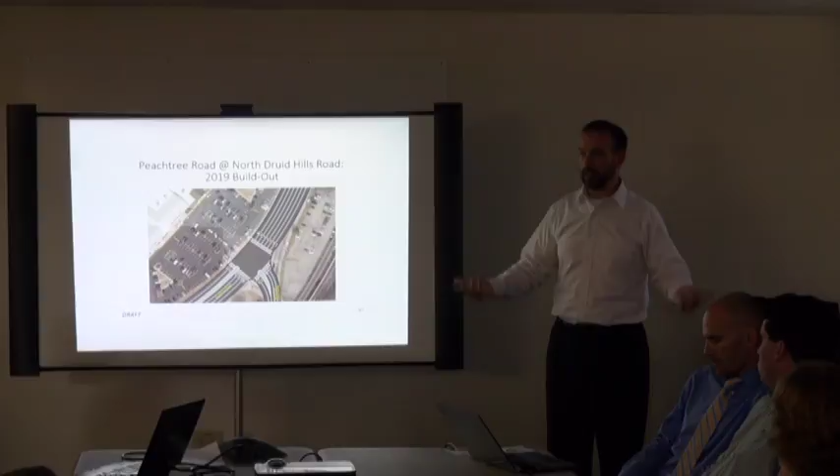The other thing that was high on our mind when doing this was trying to make things doable and that could be done relatively quickly. There are a lot of ideas floating around of big changes that would be very impactful to right-of-way and to properties in some neighborhoods. We were trying to keep our thoughts towards keeping it in the right-of-way. These recommendations, the way we're proposing to do them, keep it in the right-of-way, making it much more doable and much faster track, because we don't impact right-of-way. We don't trigger a lot of studies and needs that could come with public funding from GDOT to do these.

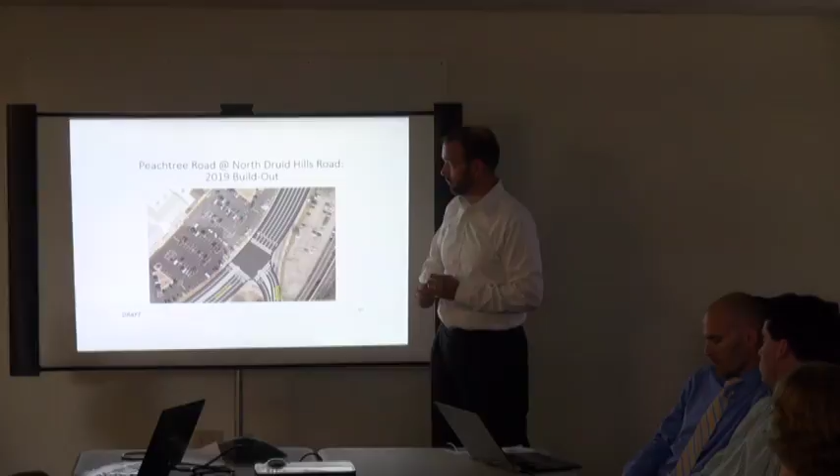Do you have any coordination of the light signals at North Druid Hills and the Total Wine Shopping Center? It looks like you've straightened that intersection up a little bit, but is the sight distance still a problem? The sight distance is still a problem. They can't run simultaneously. To make that work, GDOT's looking at that right now and they're considering it. I haven't heard the latest. When we did the study, during the analysis, they were thinking probably not, so we've assumed that wouldn't happen now. If that can happen, it's pretty easy to change some of these things in the recommendation and make it even better than what we've got. But to make that work, you may have to lower Peachtree, which is a huge undertaking.

Here at Dresden and Peachtree, y'all saw this last time. This is the main stretch where we were looking at narrowing the lanes. We could extend this down further to extend this median down.

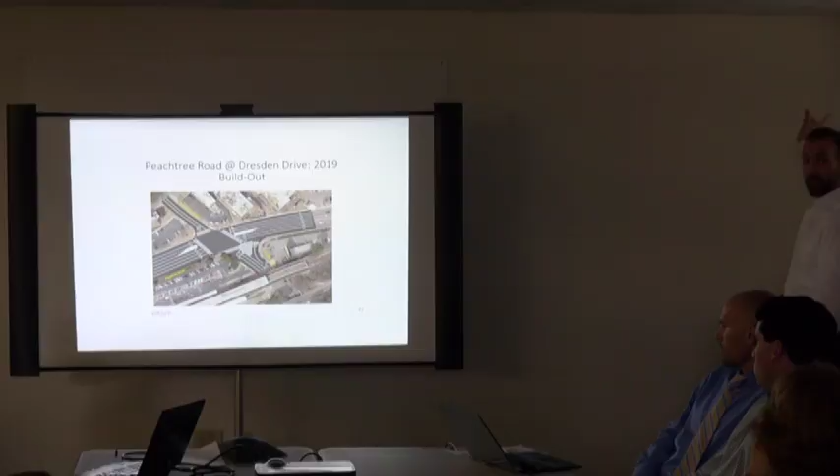There are good locations here to fit in medians with this concept. This cross section could be carried all the way up to Ashford Dunwoody, because this cross section is consistent all the way up.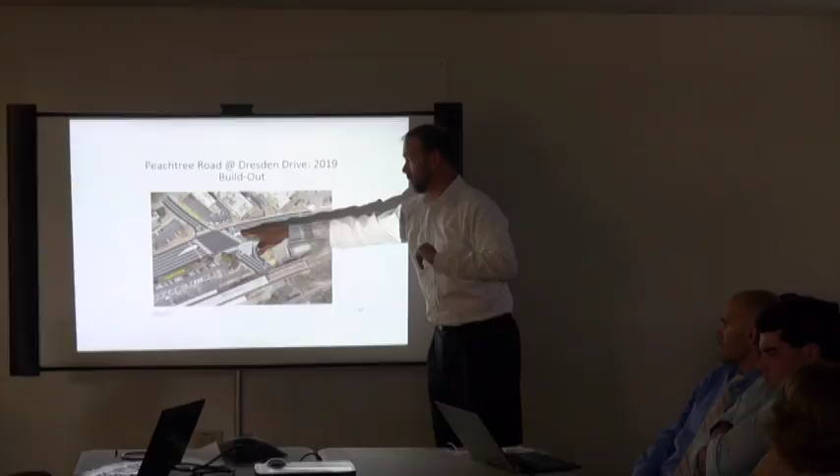When I think of this long term, and what this road may be and what the city wants it to be, I could see pieces of median dropped in. There's basically a long left turn lane that goes for 2 miles or however far it is, but it doesn't need to be just one long lane. We can fit in a median there as well and drop it in that area.

With this, I think there's great potential to carry this type of thing beyond here and up Peachtree. That's consistent with us trying to lower the speed limit, and consistent with us trying to improve the pedestrian crossings across Peachtree. Not many people want to cross as you go north, but there are MARTA stops, so we have to respect that and provide a safe place for it.

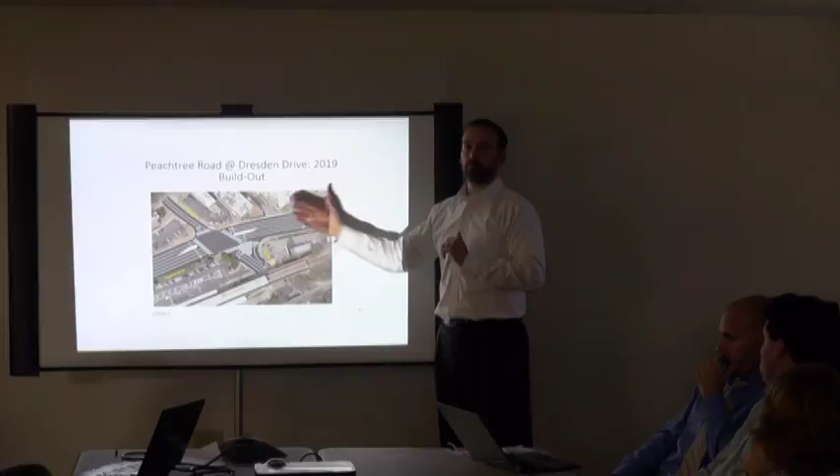So this is a concept that could be carried a very long way. But again, this is our thought—we've heard, we've listened, and this is what we're coming back with. We've got to take this to GDOT. They have to get into the nitty-gritty details of our traffic study before they'll even start to give us a firm answer on what we can do there.

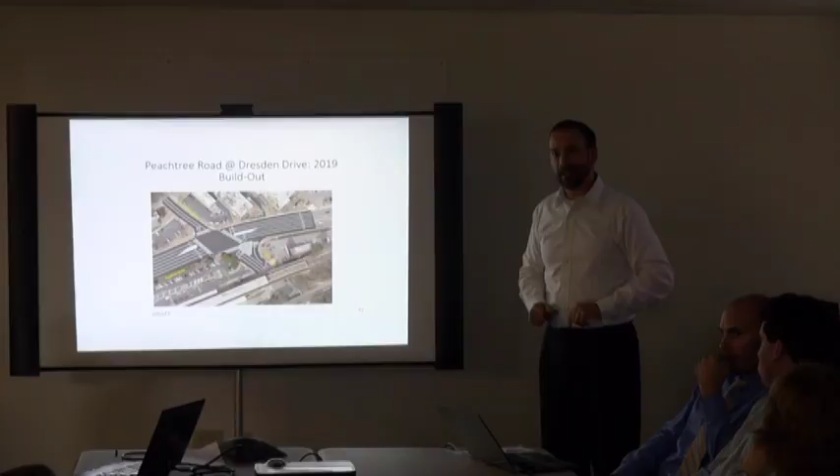There was a lot of discussion last time about that dual lane. Have you had a chance? Great segue—next slide, I still see it.

What is the truck percentage on Peachtree? Because that will dictate your outside lane width. I don't know what it is off the top of my head, but we've got it in our study, in the counts. We'll have that with the data.

So actually I already talked about right-of-way and feasibility and recommendations. When we were looking at ways to make this doable and implementable in the short term, we have some constraints up at Dresden.

So this is a picture of Dresden as it passes under the MARTA tracks. There's a column for the MARTA bridge on both sides of Dresden. This one is basically up against the back side of the sidewalk that's up on the road. This one might have a couple feet between the sidewalk and the column.

When we saw this, we saw it as not able to widen here. We heard maybe we could take the sidewalk and bore through some of the walls we have along the rail in MARTA and move the sidewalk off of the street. I like the idea of moving it off of the street, but I don't know what that does to the pedestrian environment if it's in a tunnel there along the street, and the difficulty of doing it. There's fill within here, structural dirt, so that's very complicated. Then dealing with the railroad may turn it from a short term to a long term project.

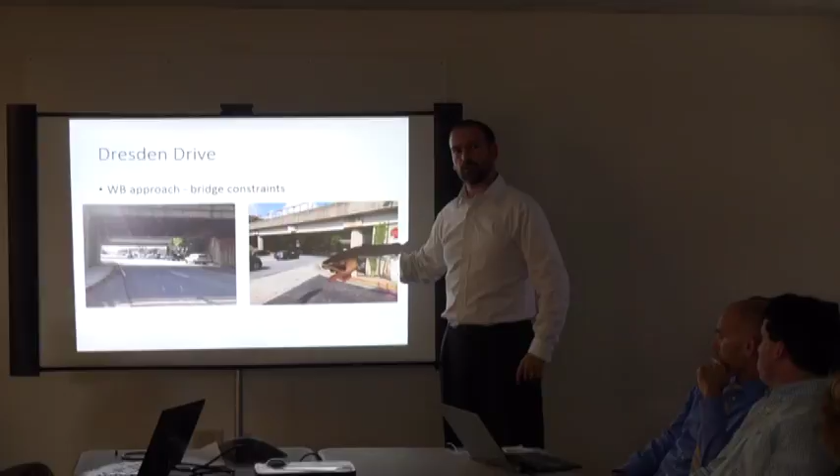What are the widths of those lanes right now? Are they 12-foot lanes right now? I don't know what these widths are. Probably 11 or 12. What's the distance from the back of the column to the face of the wall? Right here, that looks like it's about 4 feet. That's a pretty precise thing.

So when we looked at this, we felt like this was a little restrictive and not possible to do much, and we were going to be stuck with the pavement that's out there. Okay, so that's on the Dresden side.

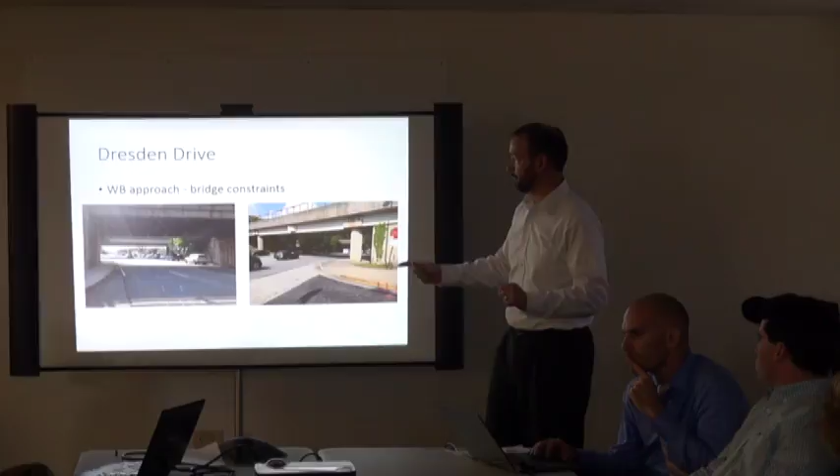But so when we were doing our recommendations, we felt like this constraint was going to limit us from adding significant width here to make that improvement.

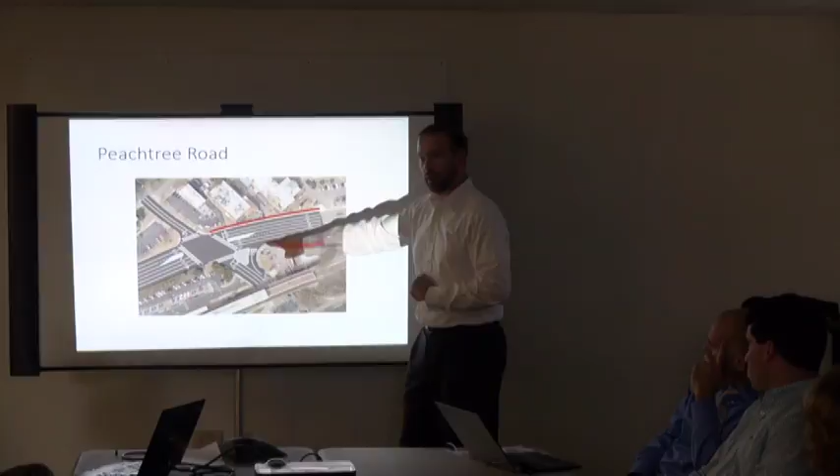So go back—oh no, this is fine. So we looked at the possibility of doing dual left turn lanes here. If we do the dual left turn lanes here, we have to have two lanes going this way on Dresden, so we lose one of our right turn lanes that we had added. With that dual left turn lane, we can't add another northbound through lane because of the right-of-way constraint here. Because to add that second left turn lane, we would need...

I totally just lost my train of thought right there. So that space, that lane that we're building right here—we're stuck with the right of way that we've got, that width that we've got. We would narrow the lanes to fit in the second left turn lane, so we couldn't do the other through lane.

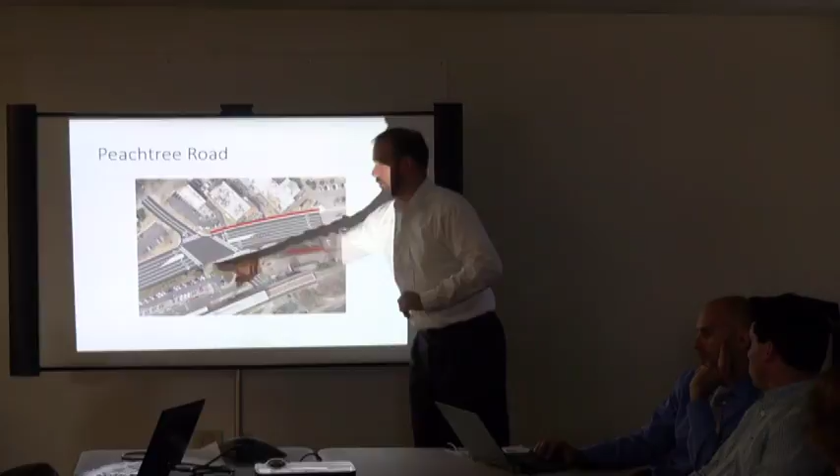What if you took out that island where your finger is right now, and that turn lane, make that the southbound left turn lane, take the median across the southern driveway to the Brookhaven Station, or whatever it's called, and make them turn left into the northern end of the shopping center, the next one up, because you also have the apartment complex.

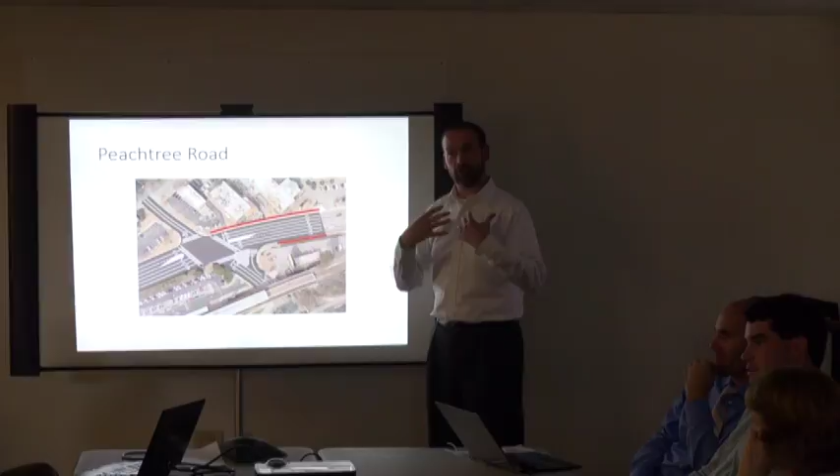That's definitely a possibility, but we're also impacting significantly. Medians don't impact businesses, it changes the paths, it's not a compensatory item. I dare you to say that to them. I'll say it's because they have access, and so again, this is what we heard. This is what we're bringing.

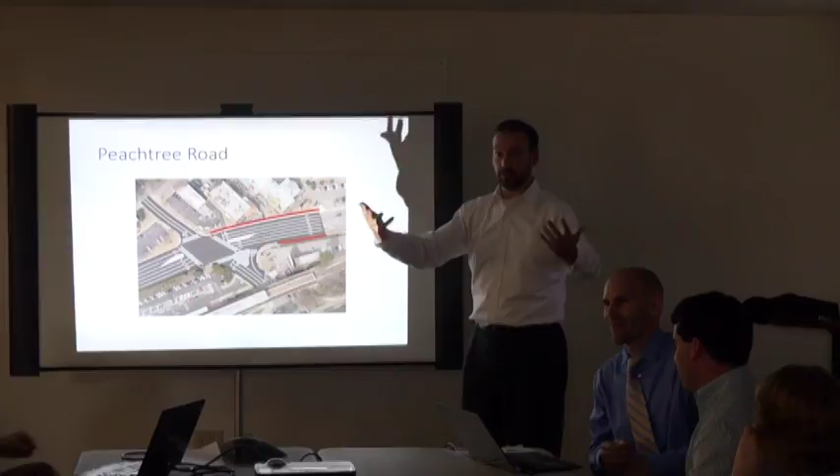That'd be almost impossible as a left-hand turn there anyway, most likely today. We're going to bring this and share it. Absolutely, there's potential for this to change.

Yes. If you do that, I would love to see you put a median, because I can't tell you how many times coming south on Peachtree, I come nose to nose with a car in my lane trying to turn into that—it's stupid. Yeah. All right, so I want to encourage y'all to keep talking, keep discussing.

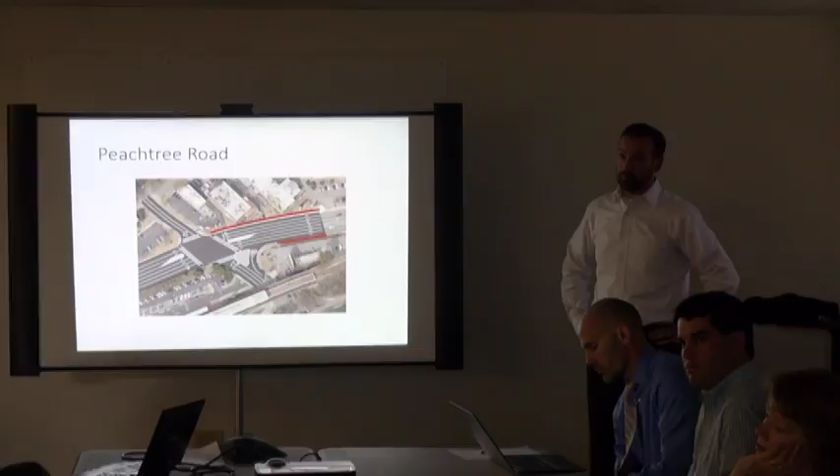As a CRB member, I really encourage you, one of your responsibilities is to reach back out to your communities and communicate what these discussions are and the interactions we're having, and continue to get that feedback so we can give it to MARTA and their development team, but also communicate what's going on in these meetings. I am willing, as I've always said, if any of your respective groups want an individual meeting where we come and talk, I certainly will be there to discuss this in greater detail.

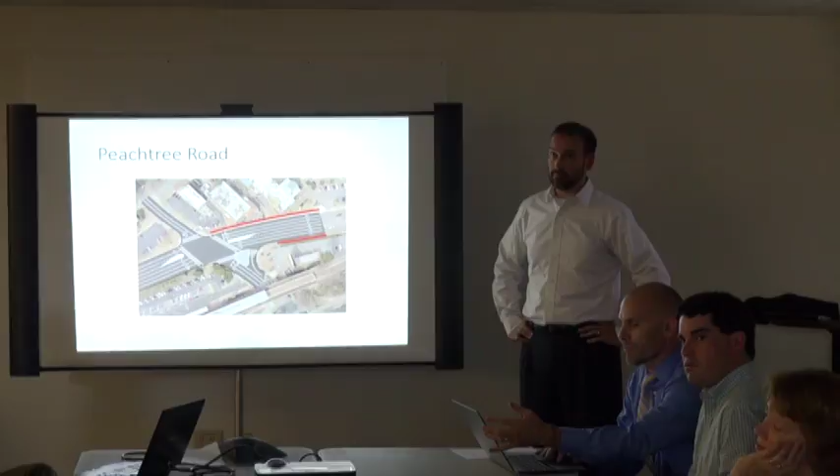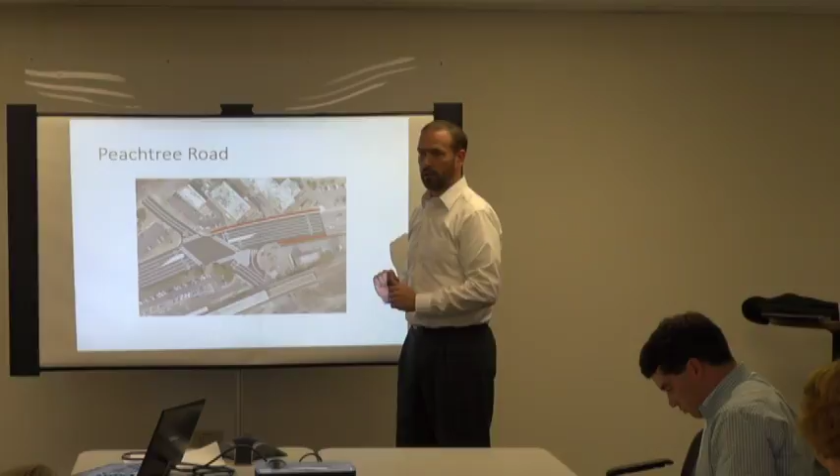We can certainly look at that. We did look at, with that second left turn lane, the intersection still needs more improvements. And so we showed that we still need that dual right. And so there's still a constraint on Dresden as well. What we need to do is go look at that dual left with the third through.

We'll look at that this week. One of the comments we did hear over and over again is that if you're adding another lane, we still need that left turn lane into the development there with Touch and Grill and the mushroom place and everything. Yes, it might be a challenge to turn left into that, but we know from the past it was just a through lane, and it was rendered unusable because people were automatically crossing over the Dresden intersection, stopping so they could turn left.

We've got to look at both sides of the coin there, because there have been multiple comments saying, as long as you keep that left turn lane, because we still need to be able to drive through. The northbound left into all these properties - it used to be 3 lanes through, and that inside lane wasn't a left turn lane, it was a through lane, and people would have to stop in it to turn, so they grabbed it.

So that's how we ended up with these recommendations, just because we were trying to be mindful of these constraints that we saw. Yes, that's what we think is a constraint. We're still going to be talking with all our stakeholders. There's certainly possibility to do other things, but back to timing.